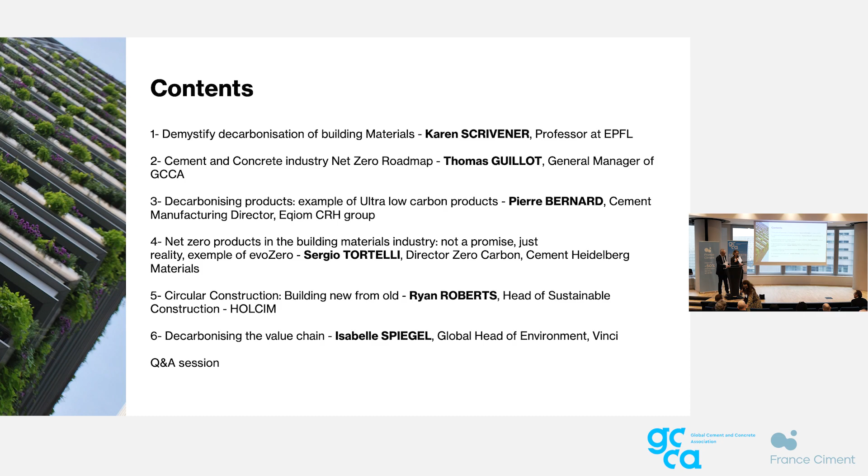Thank you, Bruno. Here you have the content of the meeting, and we will start with Karen Scrivener. Karen, we are very pleased to welcome you. Karen Scrivener is well known from the sector. She is from École Polytechnique Fédérale de Lausanne, and we are very pleased to have her.

You will do it together, Thomas? Okay, it was a surprise. Then together with Thomas, the floor is yours.

Thank you very much, Bruno, for hosting us. This is really a great setup. Honestly, we could not dream better.

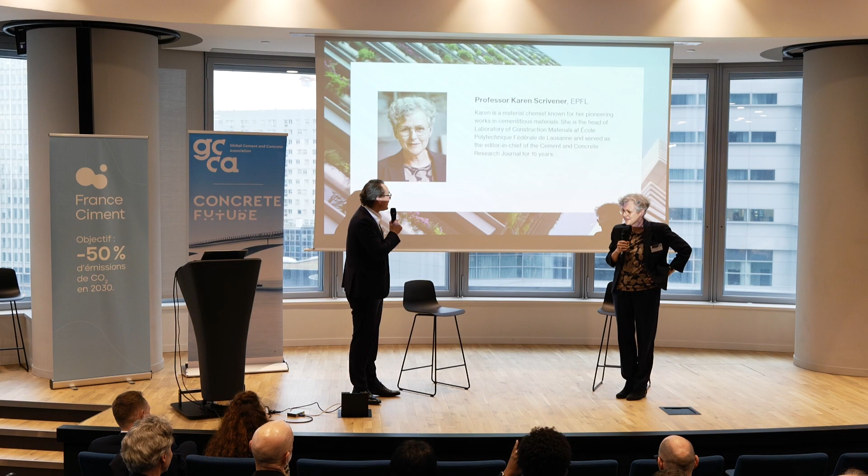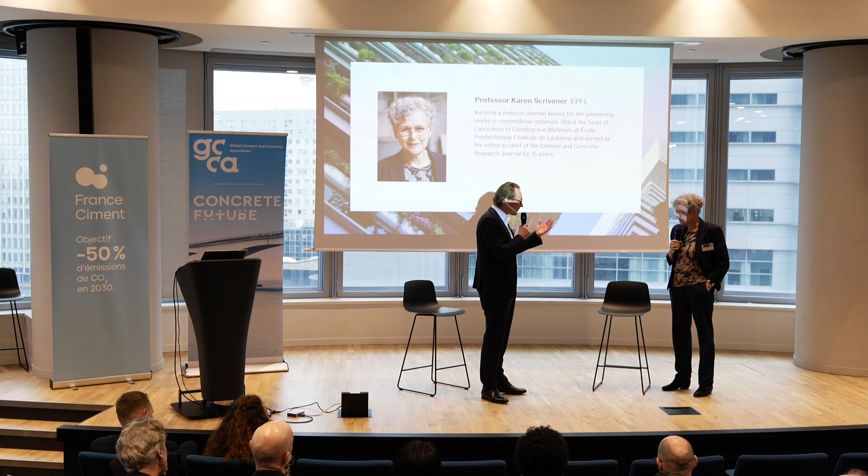Pardon, Karen, I'm sorry. It's okay. Really, I'm rude, I'm a rude French, you know that. So Karen is with us. I don't know if we need to present Karen still, but there is one thing which I would like to highlight. You've been nominated recently to the Council of the Energy Transition at the United Nations level, one of the 10 top prestigious scientific positions on the climate transition. Congratulations for this. Merci, well, thank you. Sorry, I was speaking English.

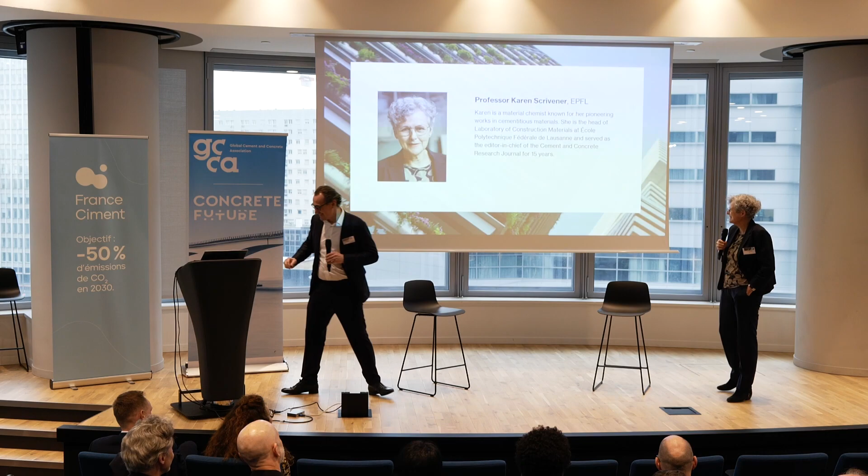Okay Karen, before we start, I wanted to have this little dialogue because I think it's interesting to have a view of what the industry does, what's academic, what's the reality. You are a bit the authority for me in what we're doing. At industry level, we very often say the product is essential, it's the backbone of modern society.

I've seen you published on YouTube a very interesting video, you called it the myth buster of carbon change. Can you tell us a little about this and why you think this product is indeed essential?

Yes, I spend a lot of my time trying to show people the misconceptions in this field. Everybody starts from the point of view that cement and concrete emits about 8% of CO2, but this is only because of the very large amount we produce.

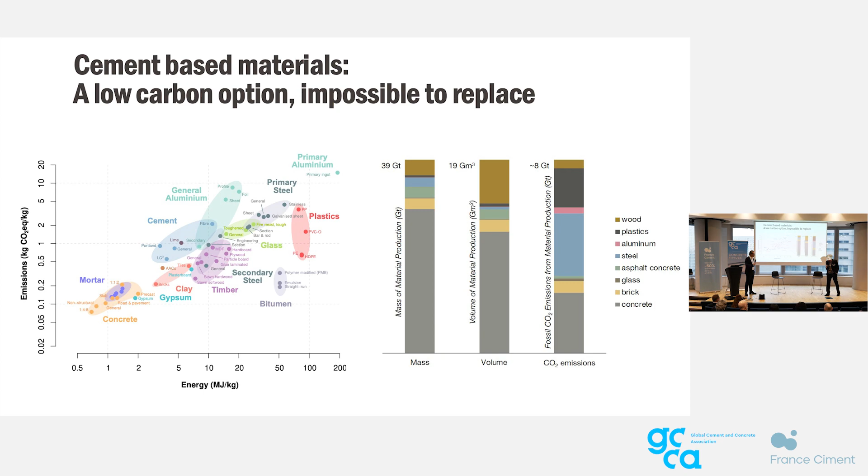That's borne out also on this graph on the left, where you can see intrinsically in terms of embodied energy and embodied CO2, they have some of the lowest footprints possible. But we shouldn't be complacent, because we can go further, but we have to go further in a realistic way.

We're hearing every day about the problems we have sourcing rare earths and things like that. We can't possibly make cements out of things like lithium and nickel. If we look at these elements, the alkalis are too highly soluble, so they will never solidify, because the basic principle by which cement works is the stuff dissolves like sugar dissolves in your coffee, but then you get new combinations of things which precipitate out solids.

There, the problem is the iron and magnesium are too insoluble. A lot of people are looking at magnesium compounds now, I don't see that working anytime soon. And even if it does work, it's not going to protect reinforcement. So we come down to really a system of just 3 oxides.

It's just incredible that we're considering the whole composition of the Earth, and we come down to 3 oxides that really can give us cement. It's no surprise, and I could go on about the geology, but please go watch the YouTubes because I know we haven't got much time. The fact we end up with this Portland cement is just an inevitable consequence of the composition of the Earth and the geology of the Earth.

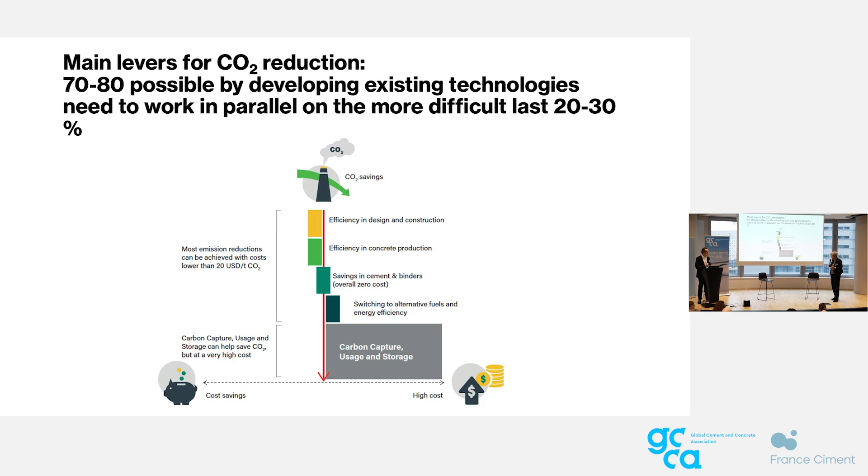We have to find ways to get the industry together. And then at the end, we're going to have some gap we have to fill, maybe with something like carbon capture and storage. But we need to also work on that gap now, because that's going to be the challenge. So that's sort of some of the myths.

So where we've got to look is in all these other regions now, because that's where it's going to happen. And if we can't also find solutions that can be used in those countries, then we have a problem. So, Thomas, back to you.

I know that the GCCA is really conscious of all of this, and your companies have really signed up to doing something. So perhaps you can explain more about that. Yeah, sure, thanks for the question, Karen.

So maybe a few words on GCCA first, on what we are. We are an association of cement and concrete producers. We represent about 80% of the world production of cement, in all the continents of the planet. Basically 80% outside China, and we also have some key Chinese manufacturers. China is 50% of the world consumption. And the interesting thing is that we really have a lot of people, and we are getting more and more attractive.

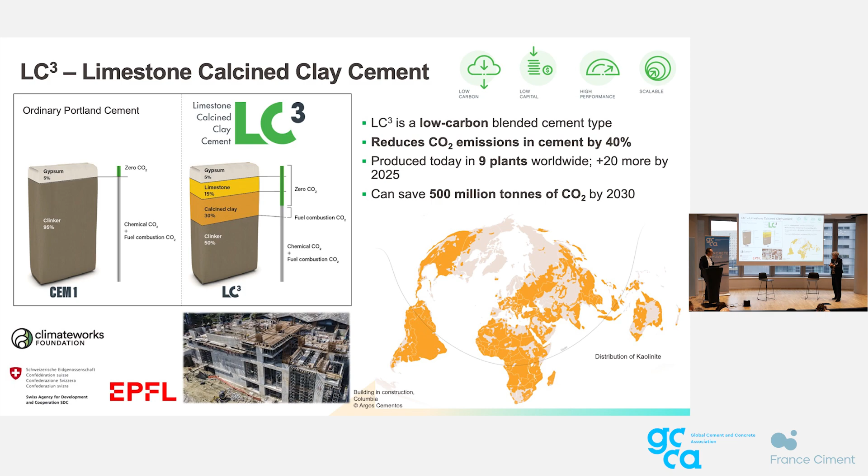So this is dramatic in the sense that it really can totally extend this logic of substituted cements. This was stagnating the last 15, 20 years. Now, if we introduce calcined clays into the mix, on a worldwide scale we can save another 400 to 800 million tons of CO2 per year. This could account for easily 20%, 30% of all cement and concrete emissions. So it's huge. As I say, it's not enough on its own.

And this is really why we've now created this Center for Worldwide Sustainable Construction. I'm sorry it's mostly in French, but we are in Paris here, and EPFL is a French-speaking university in some part. But here the idea is that we've got to get the whole industry working together—the architects, the designers, the constructors, the cement makers working together. And we've got to have research to find ways to facilitate that, because while the technologies are there, they're not being applied, and we can facilitate that process.

For example, we were talking earlier today about having good metrics for life cycle analysis—this depends on the digital revolution. And we want to focus particularly on the worldwide aspect, because, as I said earlier, that's where most construction is going to take place.

So we have to partner with institutions, with people in these countries. Our first partners will be University of Cape Town and Indian Institute of Technology, Madras, but we hope to go much further, to be able to have student exchanges with them, to really build capacity, because this is where things are going to happen in the future—to work with organizations like the UN, to work with companies, like many of you in this room, and professional associations. So that's all about our new center.

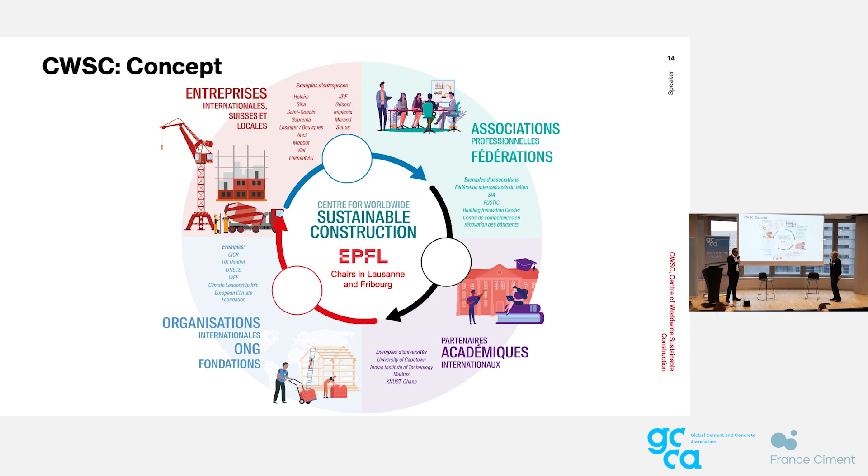But coming back to you, Thomas, because I'm sure we should wrap this up—maybe people want to ask some questions. But where is GCCA going next? I do have a couple of slides, we need to go fast.

That's the problem to do a dialogue with a professor, right? This somehow unbalanced. That's fine.

Now, the question is, what is the industry doing to actually transfer or transmit this vision of net zero, this possibility of having net zero concrete, into reality? There, with the help of all our members, the GCCA has made what we call the Net Zero Accelerator. This was quite revolutionary at the time. By now, you have a lot of net zero accelerators for everything, but at the time, we were probably the first one.

It was basically doing three things. One, we wanted to partner with all the national cement associations, going into each country to understand how to apply these numbers, this technology, in reality in the respective countries. We talk about geology, calcined clay, slag - the world is uneven with the spread of these materials. Same thing with carbon capture, alternative fuels, or the usage of waste - the world is uneven. Let's see what we need to do locally in each geography.

And doing that also means understanding how we can advance these technologies at the country level, talking about regulatory framework, regulatory change. We need a transformation in the regulatory framework - starting from standards for the product, to enable low carbon products to get into the market, but also talking about circularity. It will always be cheaper to dig a hole, put the waste in, and close the hole. If you don't have regulation on waste, you don't have a possibility for circular economy. It doesn't exist. So regulation is fundamental.

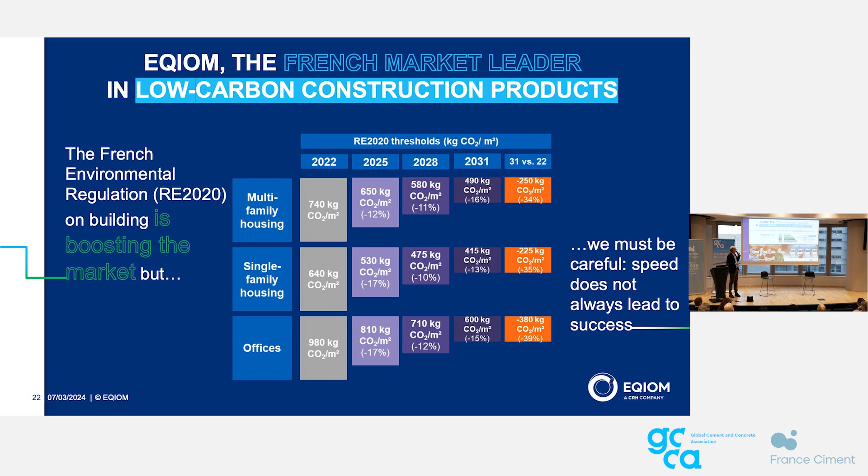What are we doing in the field? In EQIOM, we modified our portfolio - we have the EQIOM R portfolio, where R stands for respect, responsibility, and CO2 reduction. We have four categories of concrete, and among them we have low concrete, very low concrete, and ultra low concrete. We are proud to say that this year at least 50% of our concretes are going to be very low and ultra low. That's the target for our concrete business this year.

How do we get there? As we were mentioning, most of the CO2 emission in cement and concrete comes from the clinker, from the cement part. So EQIOM has the best clinker ratio on the French market among traditional cement players. We have a clinker ratio in our cement, on average, below 65%, the best one on the market. And we've been using slag for more than 30 years.

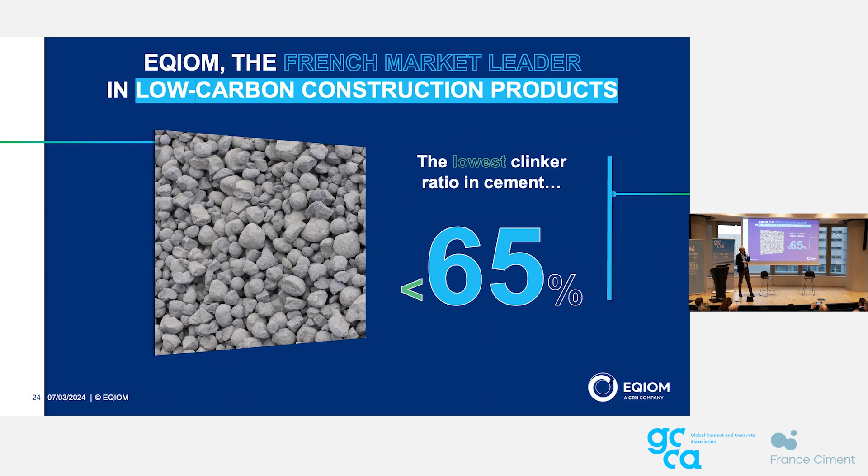We are still planning to decrease that clinker ratio and improve our environmental footprint. Our target by 2030 is to reach 58% - we are not yet at 50%, but 58%. And despite the slag scarcity that may happen in Europe due to some transformation in the slag industry, the use of calcined clay, fly ash, and better use of limestone should help us reach that level.

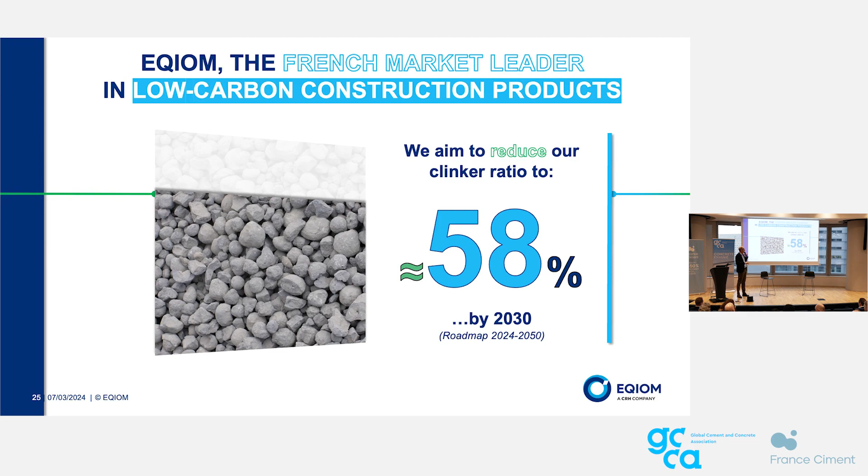The other lever we are using is alternative fuels. We again have the best average alternative fuel usage among French cement players. We are at above 65% of alternative fuels. One of our companies, Sapphire, has been supplying, sorting, and processing alternative fuels for more than 30 years.

Our goal is to reach 80% by 2030. We're going to do incremental improvement in our existing kilns, and one of the big steps for us is the next project, the K6 project. This is our big investment for EQIOM in France. It's more than 300 million euros of investment. It's a new kiln in one of our plants.

This new kiln is more efficient, 20% more efficient as far as energy and CO2. It's going to allow us to reach an average of 80% alternative fuels. And on this kiln, our goal is not to use any fossil fuel anymore.

And the main thing on this project is, okay, we are building a new kiln, but this kiln has been engineered to be able to be coupled with a CCS system. It's going to be able to run as a traditional kiln or as an oxy-fuel kiln and then be connected to a CCS system. This CCS system is a project we've been working on for 3-4 years.

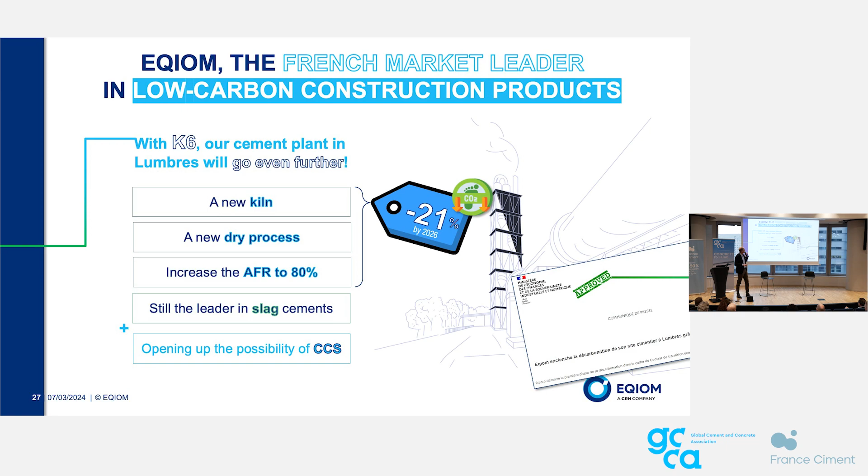So to summarize everything I said, I would say there are two groups of improvements. There are incremental improvements: better concrete, better cement, and better standards too in France. On concrete, right now we are proposing to work on the water to cement ratio in the concrete. We should be able to improve the CO2 footprint on that. Better cement, as we were mentioning, using less clinker, using more alternative fuel and more SCM. And better standards - some actors are willing to change the standards very fast, but we are still cautious to make safe and reliable materials. So we need to keep that in mind. These are the incremental improvements we are working on.

On the disruptive side, of course, as I showed you, our roadmap includes CCS by 2030. This CCS needs some support, I think, from the administration on one side. There are huge investments at stake, huge commitments for a company like us. And so far, the financial structure and the financial model are not validated yet.

We need tight regulation. Up to now, companies outside of Europe were not subject to CO2 emission or CO2 quotas. The fact that Europe has decided to implement a CBAM is encouraging players like us to invest in a CCUS system and to invest in a kiln in France. This CBAM system, where producers outside of Europe also have to comply with the CO2 part, is creating a fair level playing field, and it's helping us commit to that roadmap.

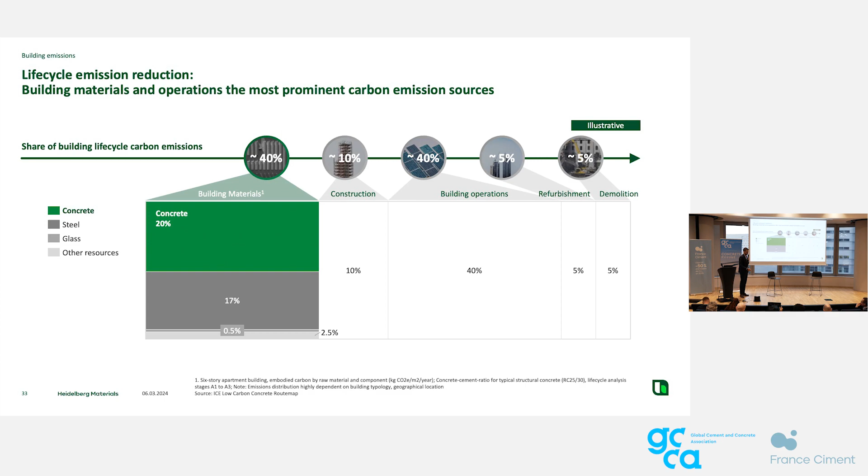Just to be practical, we all speak about buildings, sometimes real estate. If we take a look at the usual 6-story residential building, and the impact in terms of embodied carbon of the concrete and then the cement, we speak about more or less 50% of the embodied carbon that we can tackle by reducing the impact and possibly going down to zero, and I'll show you how in a few seconds. That's already significant because it means that we, as the cement sector, have the power to reduce about half of the net embodied carbon of a building built as such.

Coming to some practical points: for sure carbon capture is one solution, but reducing the CO2 as much as possible is the first step. This is something we can do, as previous presenters showed, using alternative fuels and different supplementary cementitious materials. But the point is, if we really want to go down to zero, the only way at the moment is via carbon capture, and that's it. So we can go as low as possible with the cement, but we still need something else to capture what's left, the hard-to-abate part, at least as long as we still use limestone for making cement.

So what does this mean in terms of making it tangible? This is our cement plant in Brevik, Norway, the first cement plant that will be running CCS equipment at scale, starting next year, in 2025. As you see, this means we basically have to rebuild part of the plant, because capturing the carbon, the CO2, is actually one part of the story. The other part is then to manage the CO2 and make something out of it.

What we need is the piping, the connection between where the CO2 is captured and the tank where it can be stored. Then we need a ship, for example, to take the CO2 from the storage location to the site where it can be reinjected into a gas field under the North Sea, about 2.6 kilometers below sea level. So, as you see, carbon capture is not an easy technology, but it's something actually needed to go down to zero. This takes a lot of infrastructure, a lot of technicalities, a lot of expertise.

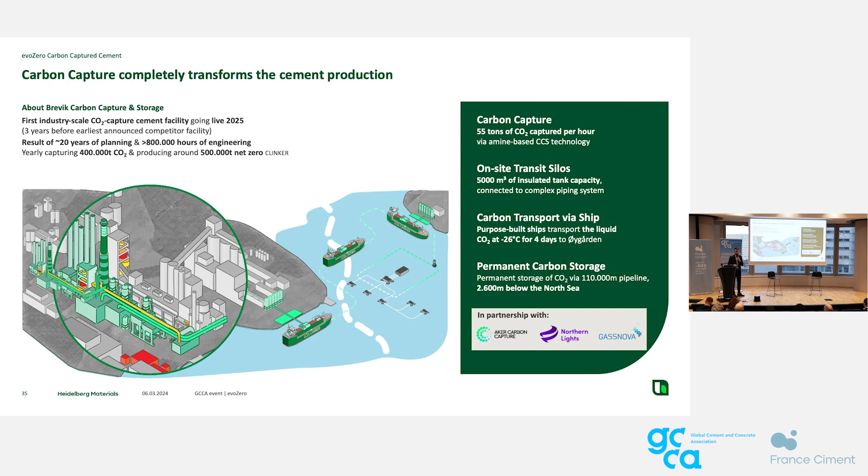And are we doing this alone? Honestly, not. We're really leveraging a lot of cross-industry partnership, like via Northern Lights, via carbon capture by Aker and Gassnova. We're taking technology that's been used for a couple of decades in the oil and gas industry and using it in cement. This means that this kind of storage of CO2 is safe, because it's been tested for more than two decades by the oil and gas industry. But the great part now is that we're putting this at scale for the cement sector. That's really a huge step forward.

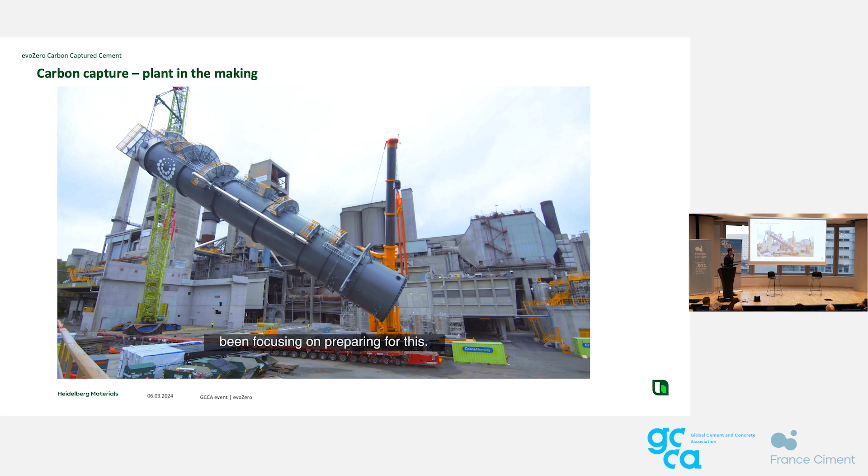Just to give you an idea of what it means for a cement plant to be revamped in that way, you see what happens when we put in place part of the absorber. This is, let's say, the big filter that takes out the CO2, leaving it on the amine side. You see, it's basically as high as the tower of the kiln.

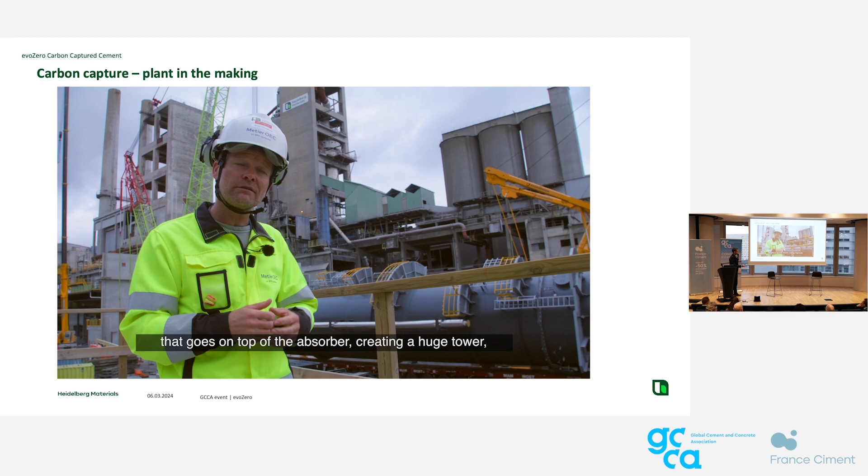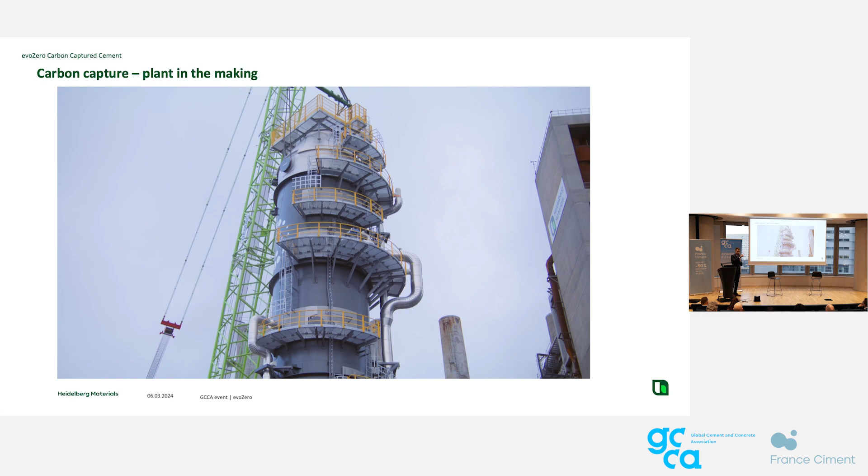And it is being now put in place, that part, and in these days we are putting in place the stack that goes on top, so that at the end of the day this will be as high as the Big Ben in London, or as high as a third of the Tour Eiffel. Just to give you some idea of what that means.

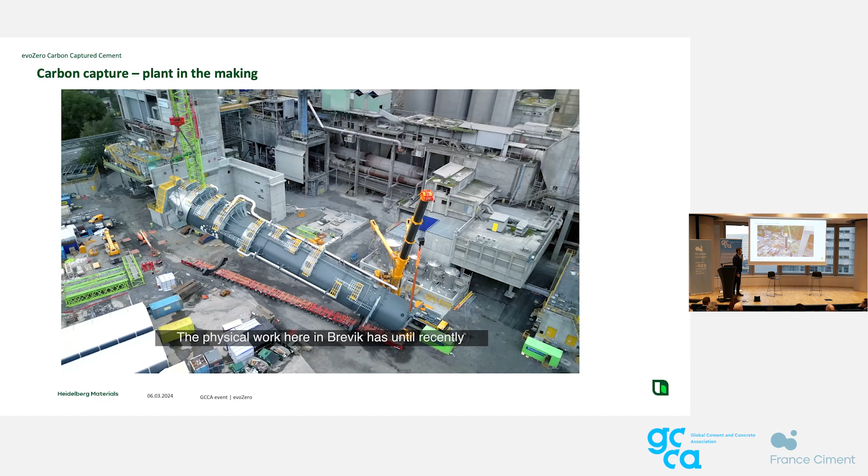Not only is the process innovative, but also how we can bring it to the customer is innovative, because CO2 is a global issue. The CO2 emitted in Paris is the same as the CO2 emitted in London, in Italy, wherever it is. So the point is, we can for sure produce carbon capture cement in Brevik and deliver it physically, as always happens in our market, but we can also think about not delivering the physical cement, but delivering the benefits of the carbon capture.

For example, if you build a building in Paris, you can estimate the CO2 that comes from the embodied carbon from the building materials in concrete. Then you can reabsorb the same amount of CO2 in Brevik using the carbon capture, and that can be delivered via a certification. I'll show you in a second what that means for the certification. So in the same way, you can still capture the CO2 without the physical need of shipping the cement from Brevik to France, for example.

I know it's something totally new in our industry. It's not so new in general on the market in terms of other commodities, because if we speak about this way of doing things, the electricity market has already been doing this for some years. So it's really a matter of shifting our mindset for the new reality that will be happening anyway in the next years. Whether we'll be ready or not will really be up to us.

The point is that from the cement sector and from the cement plants, we are really moving in that direction, and this is something we have to deal with, making sure about what it means to have this kind of approach. It means also that we are not doing this by ourselves in terms of technology, but also in terms of assurance and certification.

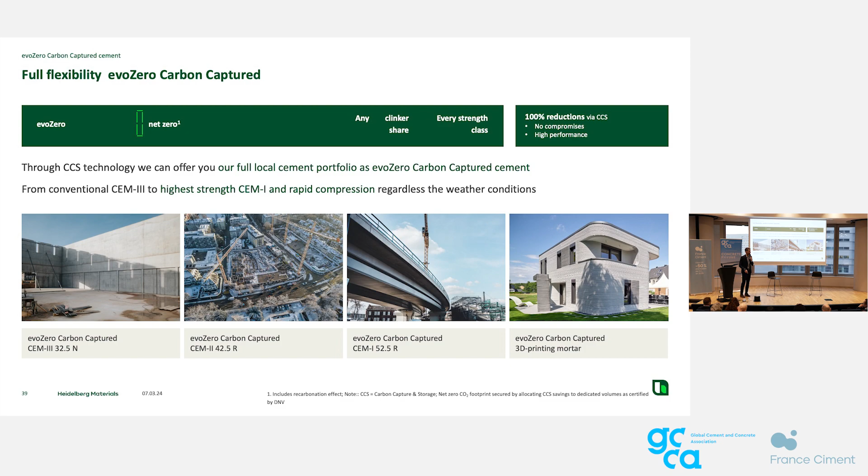In a nutshell, what we are doing now is making all the steps needed to be ready in the next year to deliver to the market something already well known to our customers, cement and concrete, but that can also gather the benefits of having net zero CO2 embodied carbon. So this implies an approach that is not just for Brevik in this case, but at a global level.

We started the presentation speaking about the 10 million tons of CO2. Well, you cannot just do it with one plant. You need more than one plant, as you see, all around Europe and also in the US and Canada. So we were speaking about Edmonton a few minutes ago.

So this is actually what is going on. And as you see, it's really an approach that is taking care of all the best available technologies that can be used in these days and in the future. Sometimes at the demo level, sometimes at the full scale, as it is for Brevik. But being really a global player in the cement industry, we believe that this is the only way we can keep ourselves in the industry and keep our business safe for the next decades.

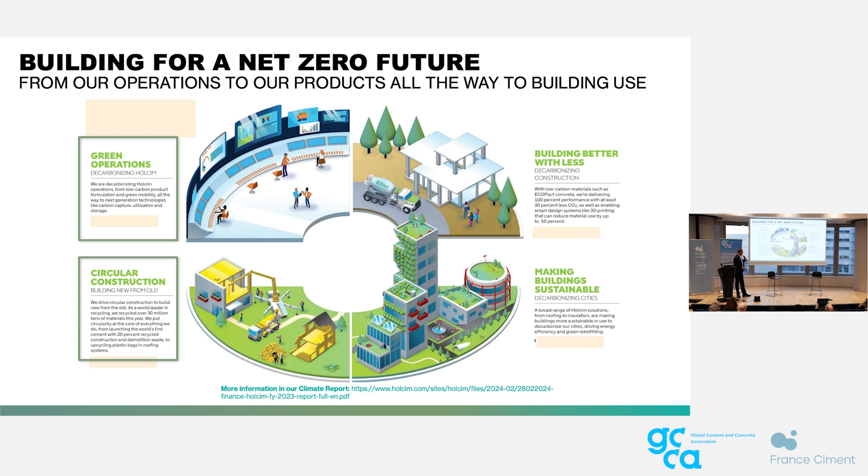So we're going to start with the case study here in France on circular construction using recycled concrete. Now, as a company, we're very much leaning into circularity, particularly with CDM, so the reuse of buildings to recover them, recycle them, and build new from old. Now, the approach that we're taking to CDM and circularity is EcoCycle.

This is the brand we've put to the recycling technology we use to recover CDM, process it, and valorize it into new materials. The concept is a technology platform, because to do this well and at scale, it's really about combining a number of different pieces of technology together to do it effectively. They could start with the processing equipment you might have at your different plants within your operations, but also digital technologies like material passports, mapping systems to understand when buildings are coming down within the right distance of another building that needs to be built, in a processed area that would be able to handle the stored materials. There are a number of different types of technologies you need to do it well, and for us, this is the EcoCycle brand.

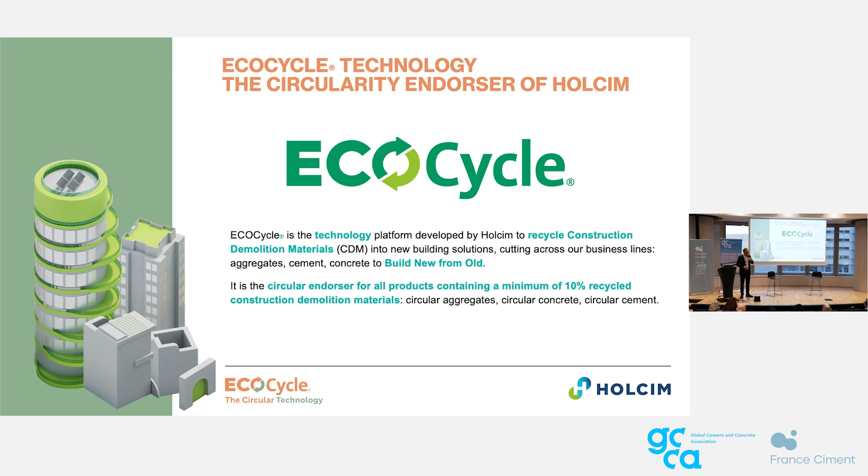When we put it into a product, so when there's EcoCycle inside any of our products, what we're doing is requiring a minimum of 10% recycled construction and demolition materials in the product. Just to clarify, where we can go more, we go more. We know with aggregates, you're going to be able to have quite a high content of recycled construction and demolition material. With concrete, you're going to be able to have quite a high amount, but probably less. And we also know with cement, you're going to have a lower amount. So the reason for the 10% is we don't want to tackle a niche subject, but we want to really grow at scale and make circular construction, and the use of old buildings to build new, the norm within the industry. That's why the 10% is the minimum, but wherever we can go higher, we do.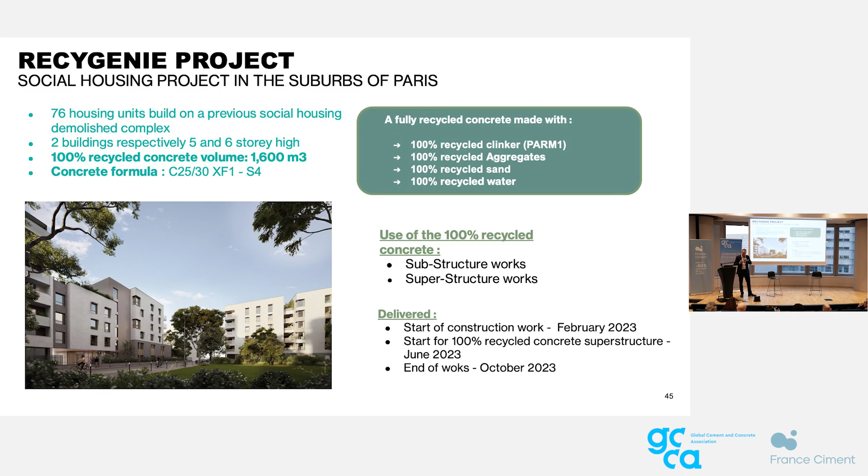Which brings me to the case study we want to talk about first, which is the Recygenie project in France, in the suburbs of Paris, where we are today. This is quite a unique project. Done last year, quite a large social housing project, partnered with a very prominent local French developer. What's unique about it is that it's the first use of 100% recycled concrete: 25 MPa, about 1,600 cubic meters. Just to clarify, when I say recycled concrete, that includes recycled cement. So very innovative, very new.

And it was done through a partnership. I think it's worth noting that that's how you get these strong outcomes, when you want to show what can be done. If we want to show that circular construction and 100% recycling of materials is possible, and to encourage policymakers to make the difference, then you really need strong partnerships to come up with an idea, a common goal, a clear ambition of what you want to succeed, and then set milestones for that goal. This one being circular construction.

So the partner was Seqens, which is under the Groupe Action Logement, which I'm sure many people here would be familiar with. And as I mentioned, when we look behind the concrete, probably the most innovative part of this project is the clinker.

So in the start of 2022, at our Altkirch facility in France, we did what I'd say is probably one of the most interesting achievements from a technical perspective within cement. We talk about substitution and lowering the clinker factor through use of other materials, but if we could get to the stage where we're able to reuse concrete over and over again in cement, just like we do with concrete, this is probably a pretty powerful lever to how we're going to decarbonize. Now, we made 2,000 tons of the material.

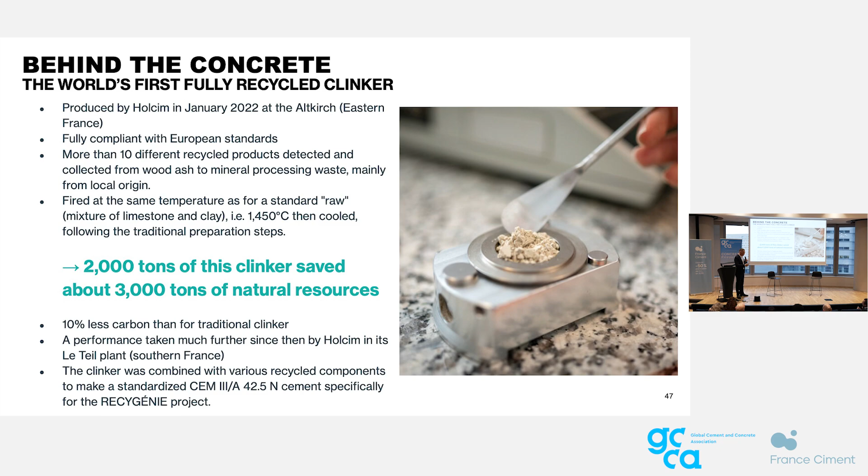We made 2,000 tons of it, and then we worked with the EcoCycle technology to bring in as much of the recycled CDM as we could into the concrete, and where possible some of it was taken from the exact same site. We used 2,200 tons of recycled aggregates specifically for this project, separating both the aggregate, the sand, and the fines, and then combined those with conventional recycled water recovery.

Now, this is a process recovery, so it's not taking wastewater from outside, it's recovering its pre-consumer content. But essentially, all the materials within the project ended up being recycled 100%, showing it can be done.

And so what we would hope is this becomes the norm. We would hope that everything becomes 100%. But realistically, like was mentioned before, we need to do things safe and reliably. So the idea is to show that it can be done today. What we'd probably expect and ask for from policymakers is to allow the standards to move quicker and do what we know we can comfortably do today. 20%, 40%, 50% is clearly a reality, and we're doing it all over the world.

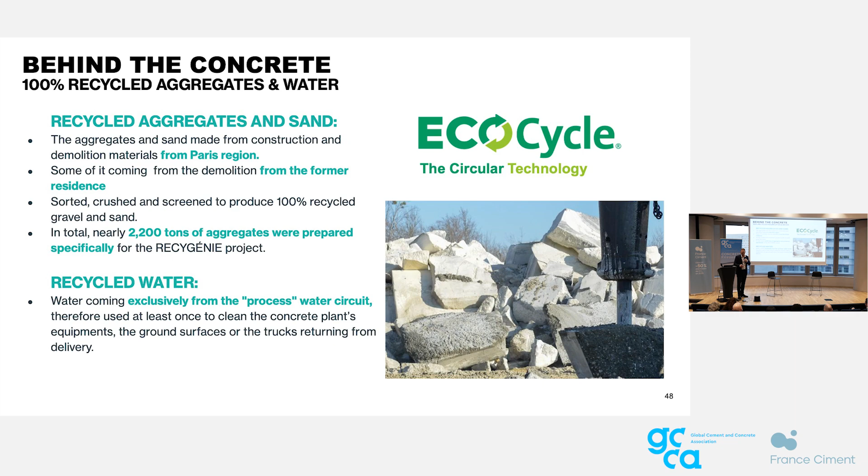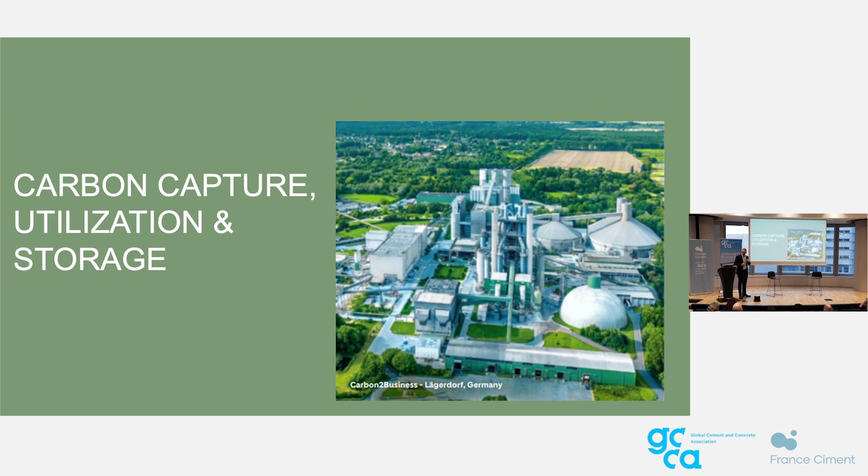So I'll move on quickly to carbon capture, utilization and storage. I'm not going to go on too much about this because I think we've heard about it, but I will cover our approach. You can see we have our roadmap, like everyone has their roadmap, SBTi validated, near and far term. But we've got 44% in our roadmap allocated to other technologies, novel technologies, which include CCUS.

So it's important for us that we understand how we're going to do that in a mature fashion. You can't just put it in a roadmap and think you're going to get there with commitments. We need to map out where we're going to put projects, what's the framework we're going to use for CCUS, and more importantly, what's the CC part, and then understand where's the U, where's the S, and where's it applicable. So for us, our projects really span 4 pathways.

The first one is conversion utilization, so repurposing for producing fuels, products like plastics, synthetic plastics and the like. The second one is mineralization, so different types of CO2 absorption, and many of you would be aware of this type of technology, and probably aware of Neustark, which we work with, recycling CDM. So you can start to combine CO2 captured mineralization with circular construction to find benefits and synergies there.

Market utilization, which is looking at particularly agriculture and the food and beverage industries. And then lastly, storage, so we get to the S.

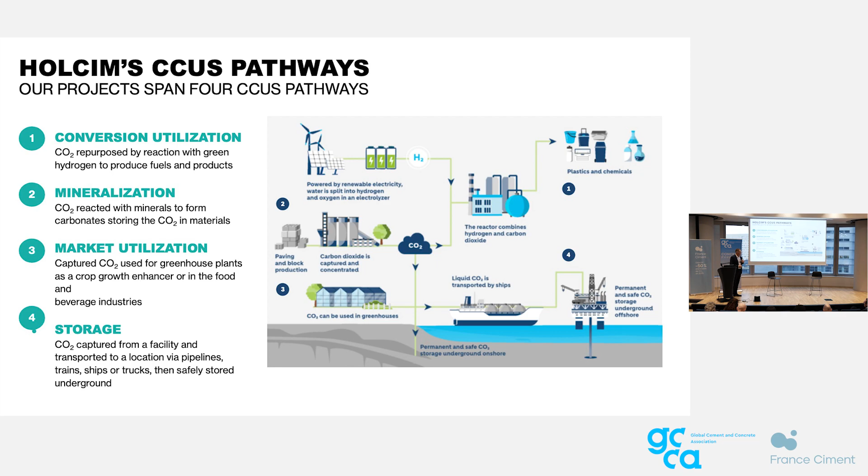Now, like we saw before, we're pretty active on what we're doing here, and we're pretty confident as well. So we have over 50 projects globally in the pipeline for CCUS, but particularly we have 6 projects that we're committing to capture 5 million tons of CO2 by 2030. That's each year, not cumulative, and we're confident because a number of those, each one of those 6, have EU innovation funds in a co-funding joint venture. So it's not all of our projects that we're going to get there, we'll get more, but just from those 6, 5 million tons per year by 2030.

However, one last thing we're looking at is you can't just look through a carbon lens at everything. I think we're particularly bad at this in the built environment when we use a carbon lens for nature. We look at nature with a carbon lens when really it's not just that. There's biodiversity, water, and health attached to it.

So if we look at carbon capture a little bit broader, it's probably a more mature way of seeing what needs to be done, seeing the risks to both the company, the planet, and the economy. It's also probably a better way to take away some skepticism people may have. If we can look at it with a more holistic approach and talk about the benefits up front, it's a more mature way of having that discussion.

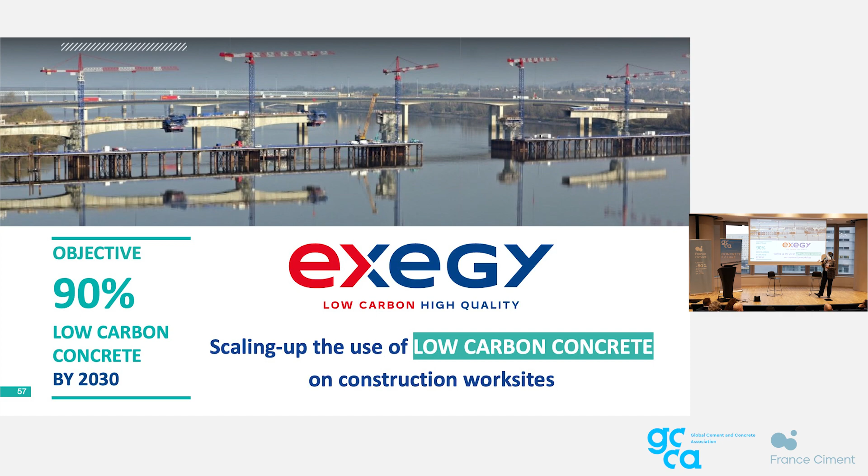So we set up an Exegy objective to follow an action plan, which is to implement 90% of low carbon concrete within all our projects. So that's mainly for Vinci Construction, but everywhere on the planet by 2030. All our ambitions are here, and with this brand, Exegy.

Three key levers in this action plan. The first one is to implement the right quantities of material. So you won't always be happy with that, but let's start by that, making sure that we apply the right quantities of material. The market is still good. We still need to implement or develop a lot of new projects so we can optimize the quantities. The second one, where we cannot work without you, is really all the process work that you are doing on the fuel, etc., to decarbonize the process itself of producing the cement and specifically the clinker.

And the third pillar is substitution. So it's also something that we are working directly with you on, how to substitute, to put less clinker within the concrete. And you see that CCUS is not on the table. It's probably a fourth lever that we do not want to activate too early in the process, because also we are at a stage where we have to become much more proactive. It starts by implementing what already exists, and preparing the huge scaling up of the low carbon concrete.

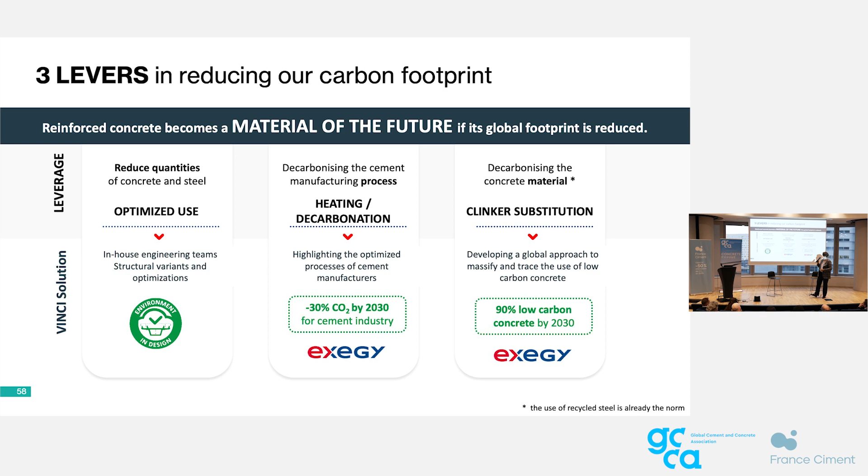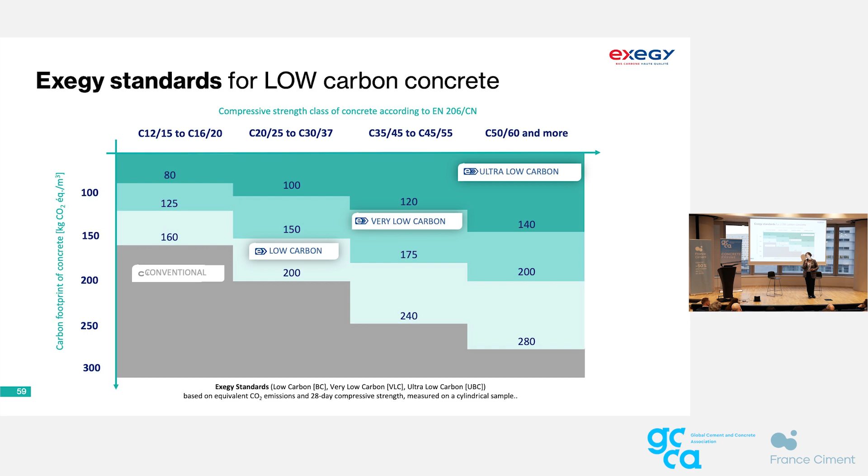It's existed for a bit more than 3 years, and we haven't changed it since. But I'm showing it to you also to be able to work together with you, and to say, if we need to revisit at some point, to put it in a common framework, etc., we're happy to do so and happy to share this kind of methodology. That helped everybody know that we are not talking only about one single thing, but that it's a bit more complex, and we love that, because the way to really put the right performance material close to what the client wants, it's definitely our job. So we just add up the environmental CO2 performance.

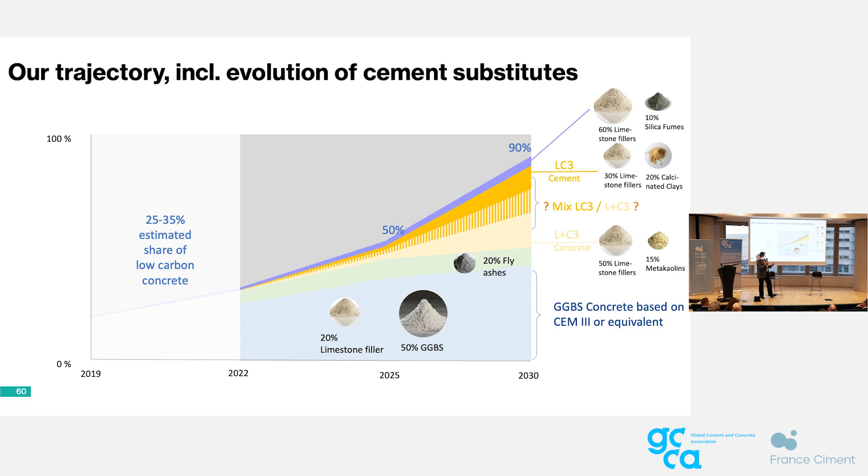And our job, once we did this strategy, is this: our job is really to make sure that we are able to deliver. So depending on the different content, mix of materials, etc., which is the recipe of a concrete that we are going to purchase, our job is to make sure that we are able to deliver for a project of a client.

So we are focusing much more on how to make sure that we have the right methods. If we need to heat the concrete, well, we're going to do that, etc. And I'm pleased to tell you it's moving, it's moving quite well according to our plans. But then it's a lot of effort.

We need to work on some standardization change at some point. It's done in France, for instance, for one part of the usage, looking at both technical performance and environmental performance together. But it's also currently around 50 projects where Vinci can say it has been made with low carbon concrete. 50, it's really not so many projects compared to the quantities of projects on which we are working. And we only can see that we have a very high level of standards of decarbonization.

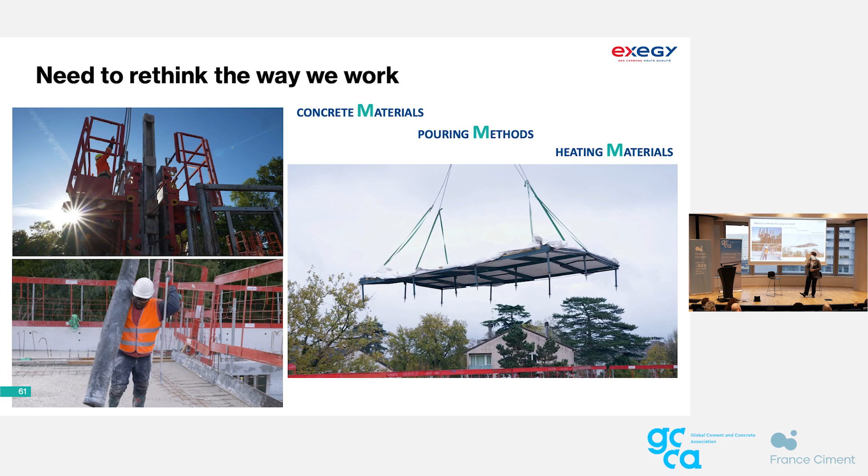And again, we are moving from the first project where we implemented low carbon concrete, which was in l'Archipel, our headquarters here in La Défense in Paris, 3.5 years ago. And now I say to you 50 projects, including outside of Europe and UK. So meaning that it's starting to come, but we need to join forces to keep scaling up. So thanks a lot for your attention, and let's keep doing this together.